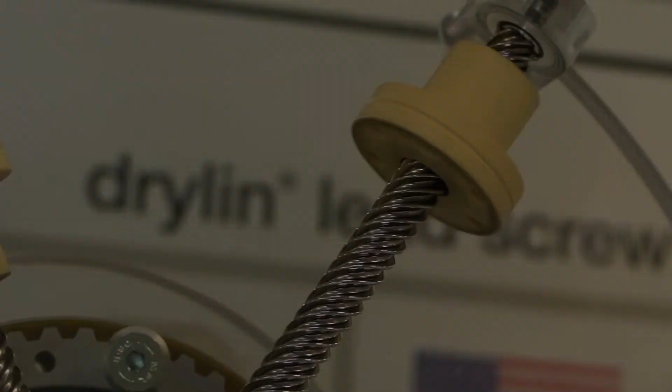Thank you so much, Matt, for the introduction. Welcome, everybody. Today, it will be everything around DrySpin and automotive. And I'm pretty optimistic we will have some great benefits for you, talking about weight reduction, eliminating grease, and many more. Let's take a short look into the agenda.

Shortly, we will discuss a little bit about IGUS and what are our special products. Then we will move over to what is DrySpin and really see what an efficient system we have here. For sure, we will talk a lot about applications, what kind of applications we have in automotive with this particular product. And then we will have a lot of great options for you to have really short lead times, really fast sample opportunities.

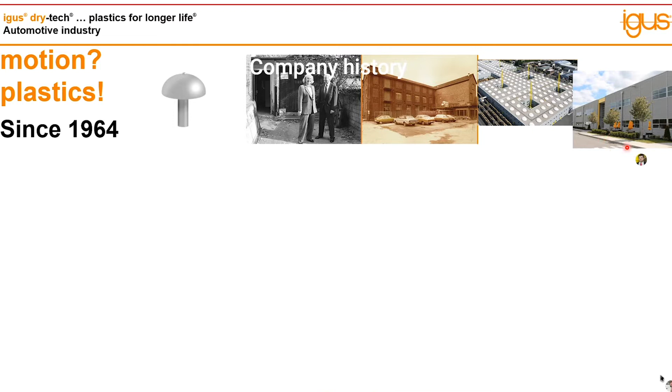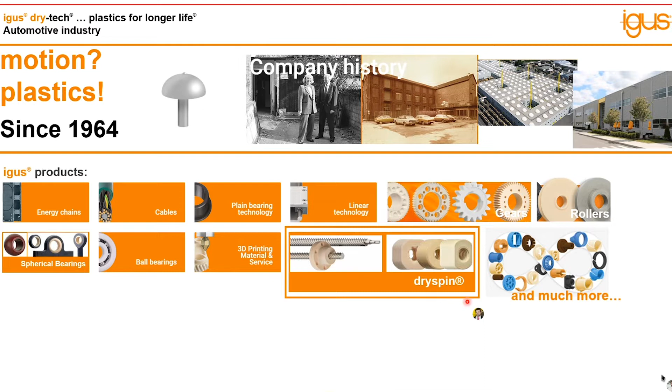During the time, we developed many more products, and now we have a lot available, from energy chains over to cables, a lot of different plain bearings, sleeve, flange, spherical bearings, but also linear bearings. We have many gear options nowadays. We have rollers, ball bearings, and a lot of 3D printing we will show you later, especially when we talk about fast samples and options to start projects with. And today we will focus a lot on this DrySpin product.

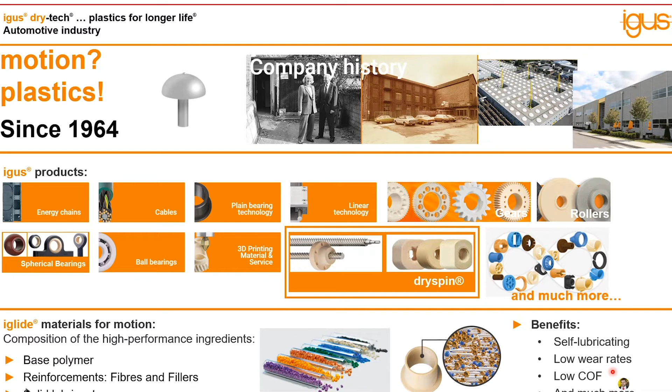What is special for all our products is the material, which IGUS develops on its own. We have engineers developing these engineered plastics and high performance plastics for motion applications. We use a base polymer from the market, then reinforce it with fibers and fillers to have an answer for every application with our different iglide materials from our catalog. And last but not least, one of the best ingredients we have are the solid lubricants. With this, our parts are self-lubricating. They have a very low wear rate and a very low coefficient of friction, just to name a couple of benefits. We will come back to more benefits when we talk about applications.

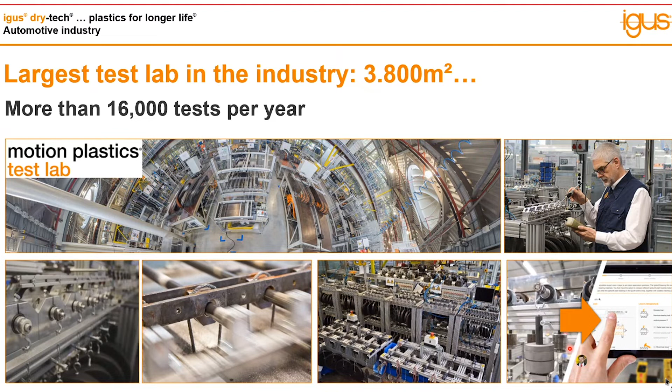Speaking of wear rate and lifetime, for sure, we need to test. And that's what we do. We don't only calculate something, we test in the laboratory. We take the products with different materials, different loads, different parameters per application, in combination with linear, oscillating, and rotating motion. Around 16,000 motion tests per year, where we take the results and put them in our online tools, so you can visit our website, calculate the lifetime, and choose the right material, and for sure, we will do this also together with you. And now, that being said about IGUS, what is DrySpin, Nick?

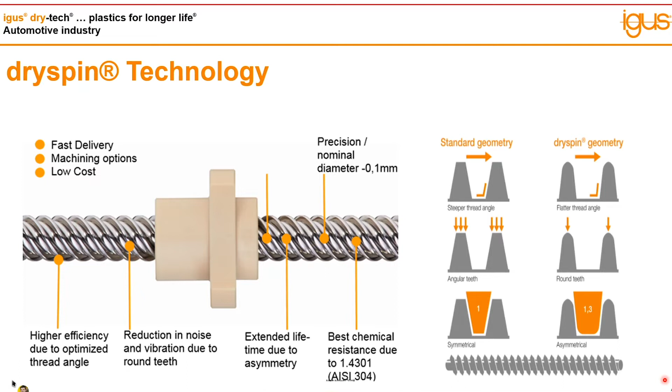Now, all of our DrySpin lead screws are standard in 304 stainless steel. That provides the best coefficient of friction when paired with the polymers we created.

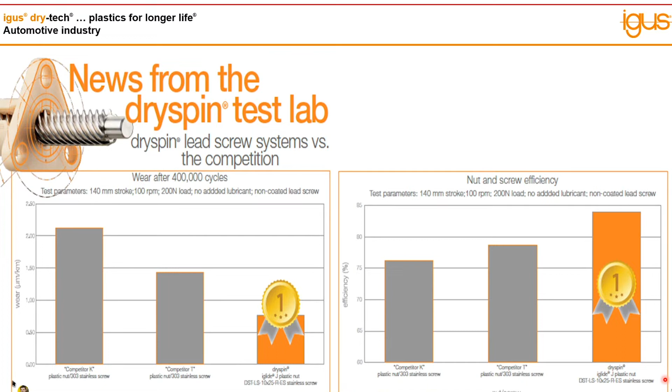Now getting more into the materials that IGUS has to offer. When it comes to our catalog, it's quite vast in terms of materials IGUS has created. Our engineered polymers are used for many different types of applications. Specifically for linear applications, and lead screws specifically, we have several different materials that are standard in our catalog.

So you can see here off to the right, we have iGlide J. iGlide J is our most commonly used material for lead screw nuts. It works in about 80 to 90% of applications. And then for more specialized applications, we have different types of materials.

For example, under the hood in a car, we have a high temperature material, J350. iGlide R is another material that has low moisture absorption. It's also slightly vibration dampening, so in areas where you might see more vibration in the car, this could help eliminate noise.

And then we have particular materials that pair really well with anodized aluminum lead screws for lighter weight applications. J200 with an aluminum lead screw provides hands down the best wear rate of any combination of screw and nut material that IGUS has to offer. So for high duty cycle applications, this would be desirable.

Not standard in our catalog in terms of publishing, but we also have new materials we've created specifically for interior applications in the automotive industry that are meant to be low fogging. We want outgassing to be at a minimum for those materials in the interior.

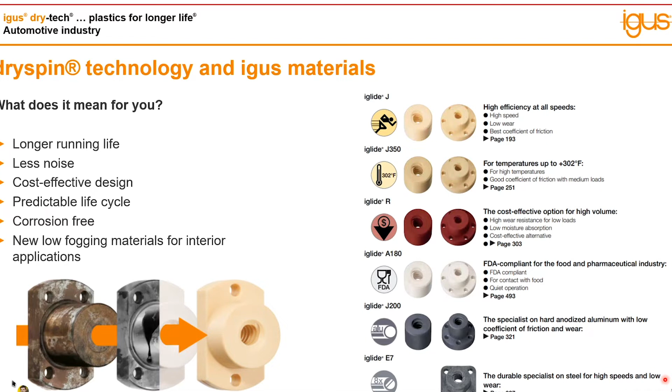And now we can move back over to Sebastian to talk about where we might find some lead screws in applications for the automotive industry.

Thank you, Nick. Since it's such an efficient product, honestly, we can find it nearly everywhere. So we start a little bit inside the interior applications in automotive. One very typical example is the seat length adjustment, driving it back and forth, which is nowadays very common to have automated inside vehicles. Another serial production part we're already selling into is the rear seat adjustment.

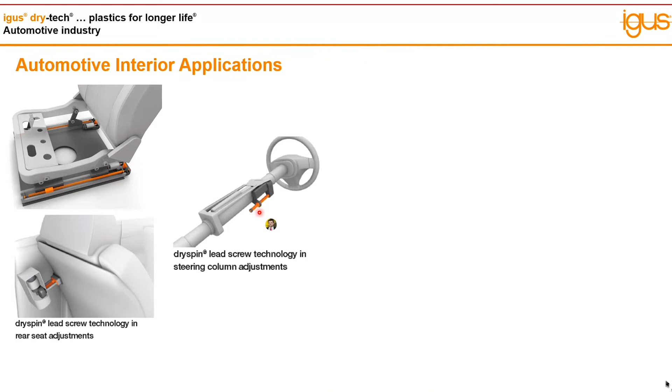You can find the orange part here for adjusting the backrest of the second row. And then for sure also in the steering height adjustment, you can find our lead screw mechanisms.

Since cars are getting more and more motion areas, even for the armrest it's very typical to have a motion area, or you'll even have a center console in larger vehicles where you can move it back and forth between the first and second row, having a fridge inside or something else, and then you can use our dryspin system based on the efficiency we have.

This picture summarizes a lot of interior and exterior applications. So an actuator - if you have a linear actuator where you can see the spindle next to the DC motor, the dryspin, based on the efficiency Nick presented, is a very strong tool for that, and especially because of the self-lubricating material we have, we don't need any greasing.

So you will have the same performance over the lifetime, which is also very important. Just to name it here, inside of actuators you can find all our sliding bearings, our gears, like a lot more IGUS products inside of all these applications are possible as well.

So already mentioned some benefits - here you can see some key benefits. The self-lubricating material is a big factor, but the NVH inside of cars, like in the interior passenger portion of the vehicle, is so silent, becoming even more silent with battery and electrical vehicles. So you don't want to hear any real noise from the application inside the seat or the steering wheel or all the others. This is where dryspin plays its benefits.

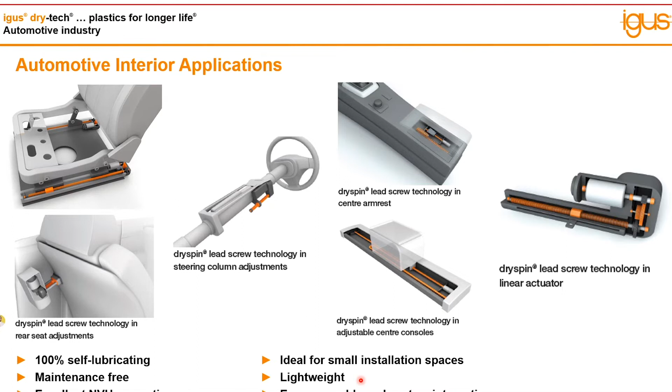And yeah, for sure also lightweight. It's much lighter weight than a metal part for the nut, at least, because the spindle for sure is the same. But the saving of weight is another big factor, also for nuts and all these common products.

Going over to the exterior side, here you can find, for example, our dryspin in the front spoiler system. So driving the front spoiler up and down, depending on the road and driving speed of the vehicle. Many vehicles have them nowadays, already running in serial supply in millions of parts with our dryspin, and the main thing was definitely self-lubricating, but also the efficiency level of the spindle nut combination.

For sure, we can find them also in the parking brake actuators, as you can see here, or running boards are possible. Different versions - this one is more related to a bus system, but yeah, you can see the dryspin spindle here. Another key application is also the tailgate actuator.

This is a very famous application nowadays - pressing one button and the tailgate opens. Here you can see our dryspin spindles as well, in the roof systems, or in all kinds of brake boosters, also here in orange you can see our spindles. We always try to say motion plastics, so you can kind of nearly think about IGUS for dryspin in linear applications.

And here we can see the key benefits for the exterior side. For sure, it's also the resistance against dust and dirt. If we think about this spoiler application, for example, you will have splashes of water, and it can be in contact with dust and dirt, depending especially on some areas, so there's much more chance to get it inside. And then because it's self-lubricating, you don't need wet greasing, no external greasing. This is a perfect area for using our materials.

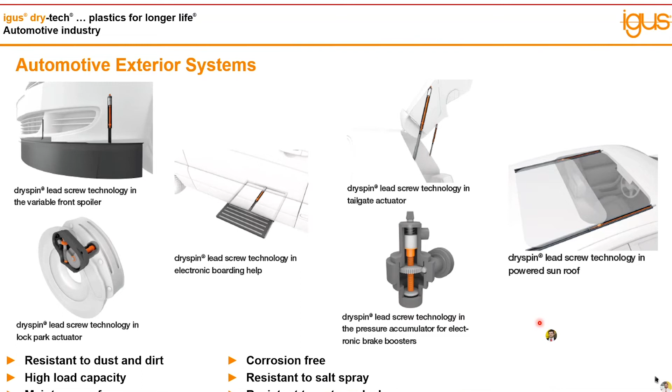All right, that being said about the applications, over to you, Nick. What kind of options do we have to start a project?

Thanks, Sebastian. So to get a project started, we have several different online tools that I highly recommend when working with engineers to take a look at. These are really great springboards to get your application started - figure out what particular lead screw might be best when balancing the amount of life cycles versus costs you can get from particular lead screws from IGUS.

So first and foremost, typically I will steer people to take a look at our product finder, better known as our expert system. This is basically a lifetime calculator, but it is a bit more than that. You can see here just some cutouts from the online tool. You can configure an application based on particular lead screw nuts that we have to offer.

So you can actually change the part that's being used to see how the lifetime will vary compared to a cylindrical machined nut or a molded nut and see what the difference in lifetime might be based on cost, things like that. So you can weigh your options with our whole catalog of standard parts.

And then once you move through the application, selecting what particular lead screw nut you'd like to evaluate, you're going to put in a few data points of information about your application. Personally, I think this tool is probably one of the easiest to use when it comes to all of the tools that IGUS has to offer. You only have to put in 4 data points: the load, the speed, the duty cycle, and the stroke of the application. So as long as you have all of that, you can move forward and find an option for your application.

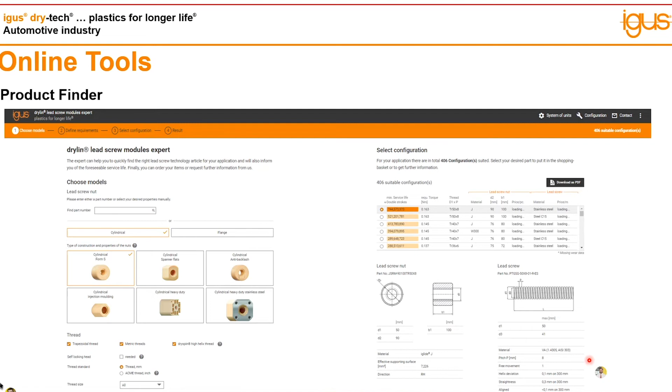Moving on to the next tool that we have, and this is by far my favorite tool that IGUS has to offer, it's the configurator. So once you have a lead screw picked out and you know where you want to go with your application from a design standpoint, now you can move into actually customizing that lead screw to fit your application. So for example, say you need to add a journal to your lead screw to work with a coupling that has a D flat in it. You can add that to the screw directly through this online tool.

This tool will give you a price anywhere from 1 to 49 pieces, and that will come directly from the tool. You don't have to talk to anybody for this. You can request a formal quote directly through this tool as well. And then anything over that 49 pieces, it triggers me to get involved, and then I would price that out for you.

Now with this online tool, it takes about 5 minutes to use. You can add a whole slew of different machining options to your lead screws: flats, keyways, feather key grooves. You can add thread to the journal of the screw. So if you have a direct drive motor, you can add that thread profile to the journal to screw directly into your motor. And the cost keeps changing based on those additional machining options that you add in.

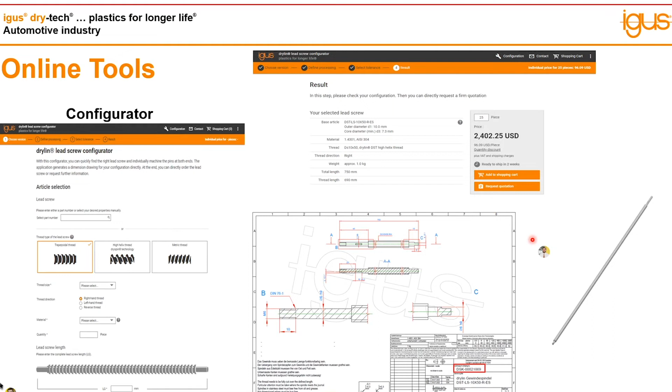Now, after all that is done, once you're set with what you're configuring, you can download a 2D print, and it's a detailed print. It gives you a specialized print number, and then once you put it into the shopping cart, it will then generate a special ordering part number that saves your part into the profile of IGUS's ERP system. So everything is automated. Once you place an order, everything is already set up in the background, and it's very seamless to get the order started for your part.

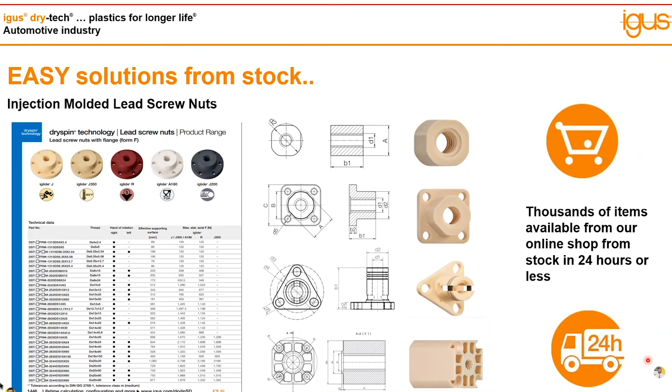Now a little more discussion about some of our catalog options that we have to offer for our lead screw nuts. Like I mentioned before, we have several different catalog materials that we publish. So we have thousands of different lead screw nuts that we can ship from stock in 24 to 48 hours or less. I think everybody knows throughout COVID, many different companies have had supply chain struggles. What we're aiming to do, especially this year and moving forward, is holding more parts in stock. That way we can get these to you quickly to start your project. So taking advantage of these catalog options for prototypes is a great way to get your project going and get it going quickly.

Also, we have another online tool to create SLS, laser sintered 3D printed parts. This online tool is great, has a drag and drop feature, so you can take your STEP file, STL, many different types of file formats.

You can drag that and drop it right into the online tool, and it will basically spit out a price to you and a lead time. Because we have a live print lab in the US where we have 2 different printers, we're basically able to provide a lead time anywhere from 2 to 5 days. So you can get an SLS printed part that not only will work in terms of form and fit, but you can get a little bit of function out of these parts as well.

The standard nut material that we typically recommend to print parts in is called i3. This is pretty similar to our iglide J material. So you can actually use this for some initial testing, and you can get a baseline and understanding that, yes, it's not the actual material that you would be using in production, but you can get an initial look at our material and see if it would be working in your application.

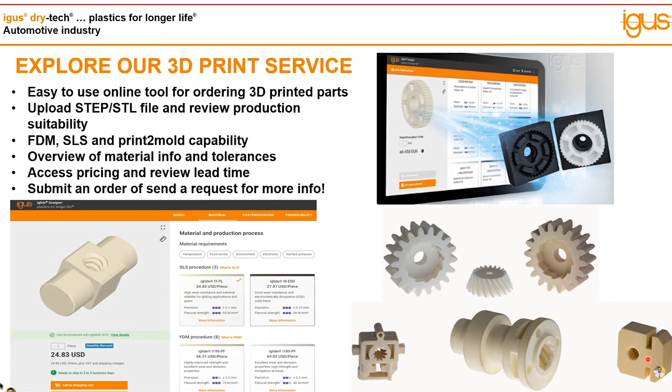We do have the ability to print all different types of parts. And the best part about this tool is the fact that everything is based on the weight. So it doesn't matter how complicated the part is, it just matters with the weight. So as long as the part is light, it's going to be cheap. If it's a larger part, it's going to be a little more expensive in the online tool. But this is a really great feature, and it helps reduce on time, lead time, and costs compared to machined parts.

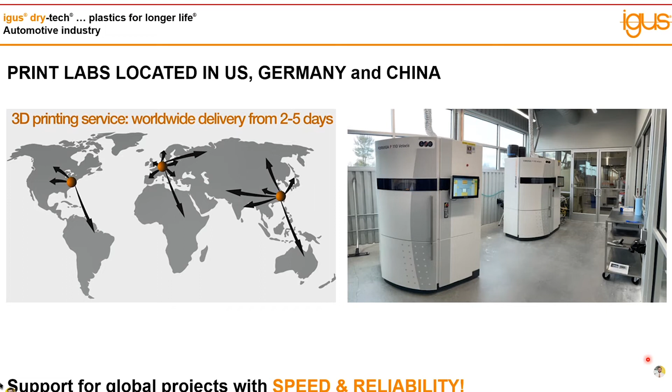Now, we do have the ability to provide all of our parts being machined from bar stock and other semi-finished materials. And I do want to note that if your company does have locations outside the US that they would be sourcing parts from, we do have print labs located in Germany and China as well.

Now, as you continue on with your project, again, those 3D printed parts are great to get your project started. Once you do settle in on a design and you're more willing to start placing orders for some more production ready parts closer to production quality, we can machine these parts from our semi-finished products. So we have just about the majority of our materials that we make in extruded bar stock, up to 100 millimeters in diameter, so we can make a wide range of parts.

So for example, you can see this lead screw nut over here to the right. This is for a 50 millimeter diameter lead screw with a metal custom made adapter for an extremely high load application. So we have the ability to make a large variety of lead screw nuts from our semi-finished products, as well as tube stock to get past that 100 millimeter OD. And then we also have plate stock.

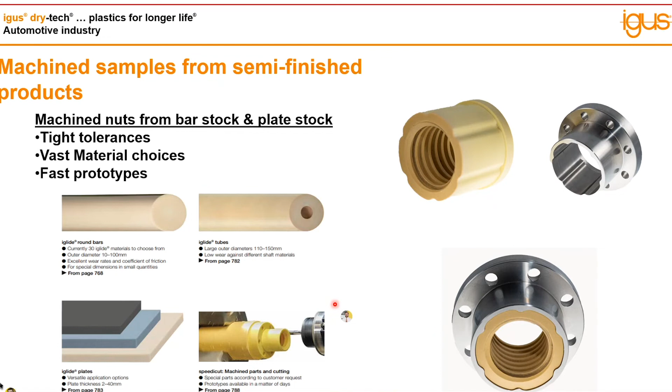Now, the benefits to machining parts from our semi-finished products are the fact that you're going to get a part that has better tolerances, more closely to what would represent a production part compared to those 3D printed parts. And you can still get a pretty fast lead time from these as well. Typically, we're around 6 weeks for parts that are machined from bar stock.

And last but not least would be our world famous injection molding capabilities. In the last few years, we've really spent a lot of time investing in infrastructure for molding lead screw nuts. So building up a repertoire of some standard catalog parts that you can get from stock, but also the fact that we have a tooling department ready to go to create a tool for your project.

So if you need a custom made nut, something from our catalog isn't going to fit into your application, we can make a tool for you that would be staying in igus. It would be maintained by igus for your project. And one of the things that we also do, it's an added benefit, is the fact that our tooling team works to optimize the designs that you've created to make them more moldable.

So you can see here as an example, this was quite a large lead screw nut that the customer had to work with. It was one solid part other than the ID for the thread. Our tooling department came up with a way to optimize this for molding by adding these cutout features, which also helped optimize the part in terms of a loading capacity. So this part is being used for an extremely high load. Adding these cutout features actually strengthened the part rather than it being one solid part. So our tooling department is a value added to the process as well.

And one of the things that we've really improved upon in the last 2 years, I would say, is our ability to not only mold the blank, but also mold the thread in the nut during the process of molding. So this helps decrease the production time, cutting down on lead time even more than when you would normally mold a blank and then tap the thread in.

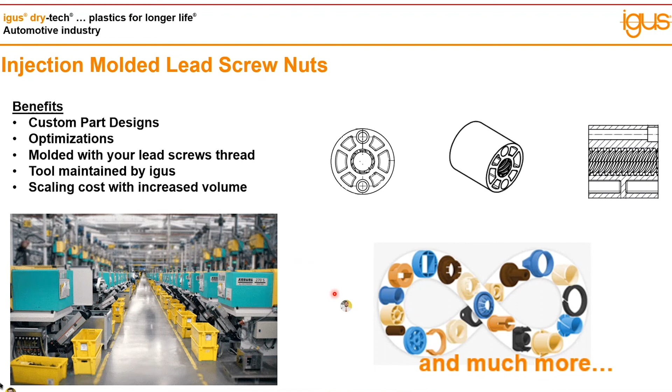So now we can actually mold the nut and the thread all at once. And this also helped further scale the cost down as production volumes increase. And now back over to Sebastian to talk about quality.

Thank you, Nick. 3D printing and machined options are very great ways to start into projects with special designs, custom-made products for your individual applications if the catalog doesn't fit. So very nice. For automotive, quality management is key and is one of the biggest requirements we have to fulfill, and you need a partner you can trust. You want to have a partner for a long-term relationship, and that's what we want to be for you.

So for sure we are certified by ISO 9001. We have the IATF 16949, but also environmental ones like ISO 14001. Additionally, for our materials we have fogging tests, burning rate certificates, REACH, GADSL, and we do IMDS for you. So all of that is the basis for quality, but additionally, we do an optical control check for the parts.

You can see our system here. It's an optical visual check by camera systems from above, below and the side, and the parts go over a plate, are checked by cameras, and only pushed out to the back for you if they are okay. And this is another big tool to give you 100% control-checked parts.

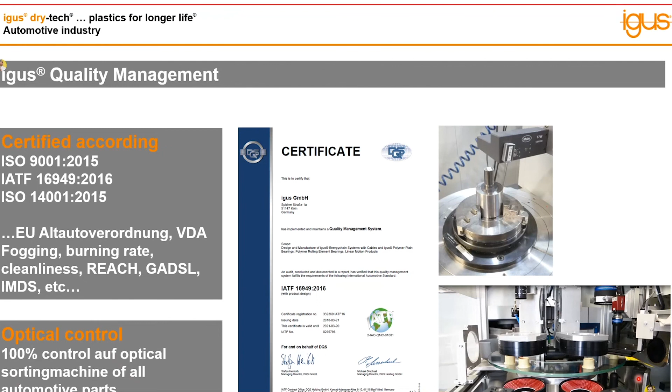Also, similar to the 3D printing Nick showed, we want to have global standards and give you a great partnership around the world. We have 35 subsidiaries in different countries around the world: USA, Poland, Italy, Taiwan, China, and many more. And additionally, we have 55 partners in other countries.

So we want to give you the best possible service support, working with the same company on global projects, especially in automotive. This is very common, and usually the customers are really happy with it, so that they can talk to igus in China and igus in the US for the same projects.

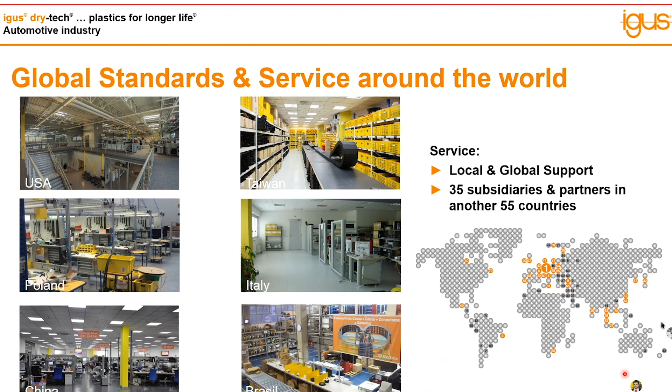As I mentioned in the beginning, please feel free to reach out. We have a lot of great free samples, starting with a brochure with a lot of drylin information inside, showing much more on the application side and on the efficiency Nick presented. Then we have one of the perfect samples to give you an idea how efficient the system is. This nut and spindle combination will move completely out in a couple of seconds without any external greasing. So this is a great sample to see how this product really works in reality.

We also have a great thermo cup, especially nice in the winter. But before you fill in your coffee or tea, you can take out the samples we put in there. For example, this sample sleeve is in the cup, and many more related actuator samples like sliding bearings, gears, etc. So if you want such a sample, just let us know.